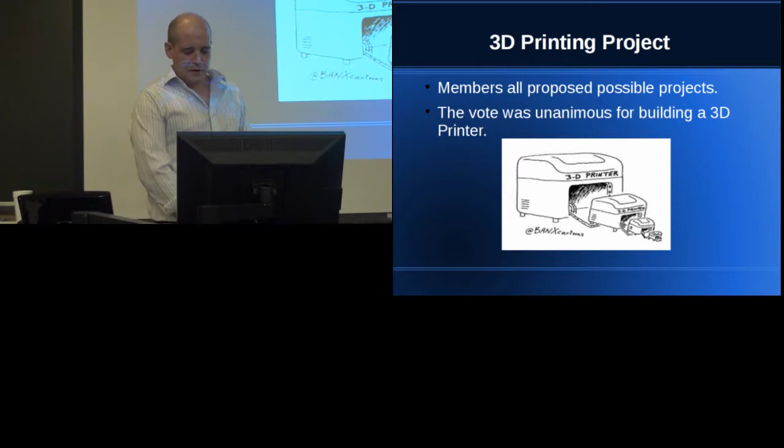So at our next meeting, we had a guest speaker, a member from the local Winston-Salem Fab Locker hackerspace. He brought in a RepRap printer to demo for the club, and everyone was really impressed with the performance and accuracy of the parts it was producing.

After more research on the RepRap forums and discussions with other people at the hackerspace who had made their own printers, I was drawn to the machine and decided to build a variation on the Mendel Max design, which is this one here.

After researching, I found out it was one of the more popular DIY choices in the 3D printing community for several reasons. It's got a pretty rigid A-frame construction.

It's also got space for a larger build area than the heat bed that I have here. I'm actually going to upgrade it to match about the size of this aluminum disc the heat plate's sitting on.

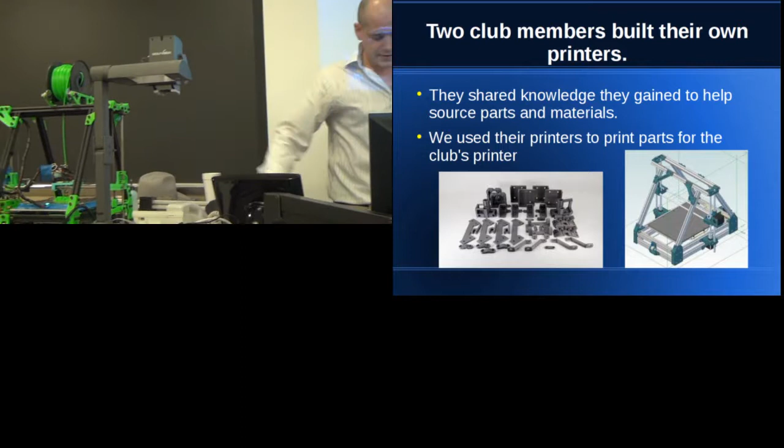There's also a lot of choices for components, as far as whether you want to use low-end drill rod for your linear motion components, or go with a higher-end rail and car system.

This is from a company called PBC Linear, and it's got nice smooth motion. It's coated with Frelon, a chemical-resistant Teflon-type material, and then a ceramic-coated rail, with very little play, hardly any play whatsoever.

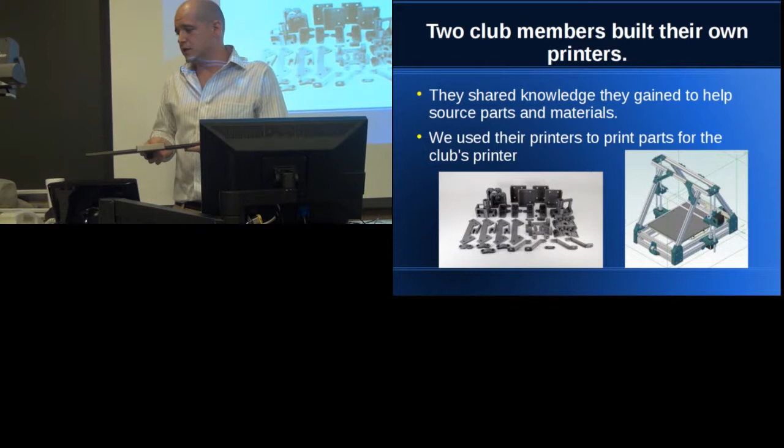So as soon as I get back home, I'm going to tear this down and rebuild it with some new parts.

Also, another member of our club, Edgar Salazar, came upon this new extruded aluminum profile designed specifically for linear motion components, known as MakerSlide. He used this to construct another open source design known as the OrdBot, which is also gaining popularity on RepRap and other places.

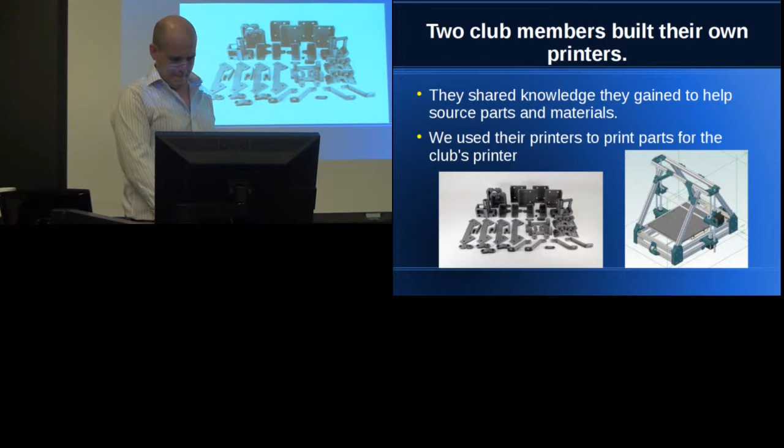So how I went about constructing this: first, I talked with Austin, who had demoed his Mendel Max at the club, about getting the parts that I needed, all the green parts here around the frame. I got the plastic ordered, then had him print up all the parts.

Then I went back to the RepRap forums, got the bill of materials, and started getting the extrusions, the drill rod for the linear motion components, Acme threads, stepper motors, electronics, and some more filament to print with.

Through the efforts of Edgar and myself building our own printers, it also helped provide the club with the benefits of knowing where to get parts at a good price and also at good quality.

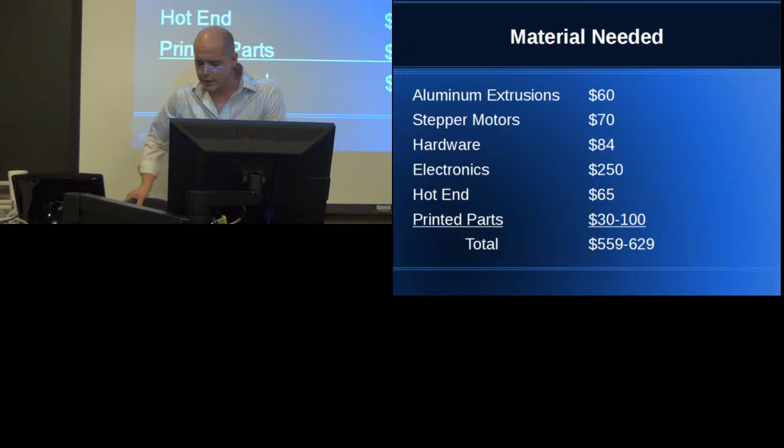So some of the materials needed, or pretty much all the materials needed here. The aluminum extrusions were acquired from a company called Misumi. They've got an outlet here in the United States, so you don't have to get it shipped from China, so you can get it pretty quick.

It's about $60 to $70 for the extrusions and the T-nut slots that you need, and depending on whether you want just plain aluminum or if you want to anodize it, I think it's about a $5 difference.

Then the stepper motors run about $15 a piece. You need 4 to 5 depending on what kind of extruder design you want to go with. Then you've got the hardware, the nuts, bolts, the drill rod for the linear motion on the X, Y, and Z, and the Acme threaded rods.

Then the electronics, this is using an Arduino RAMPS setup. It's got an Arduino 2560 with the RAMPS 1.4 shield on top, and that was obtained through reprapdiscount.com. It also came with the heated bed, all the end stops, and the display and encoder.

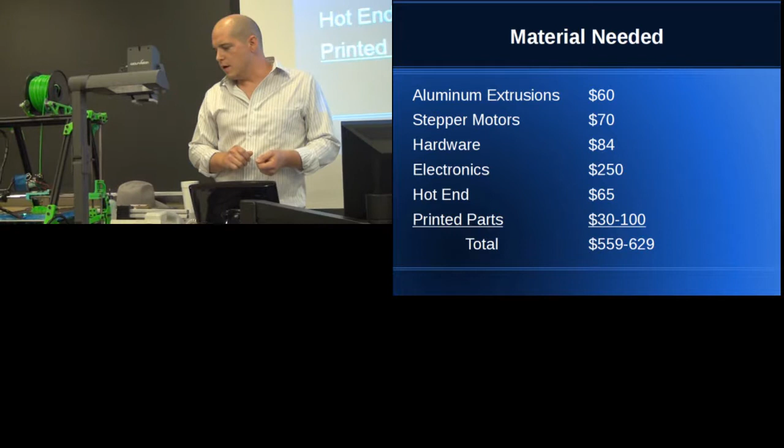Then there's the hot end, which is like a glorified hot glue gun tip. It's got a heater element at the end and a nozzle, printing at 0.4 millimeter currently. It's an all-metal nozzle. Some people like the J-head, which has Teflon going through the inside, but that wants to max out at like 240 centigrade. So if you try to print things other than ABS or PLA, you can have troubles with that breaking down and melting and falling apart.

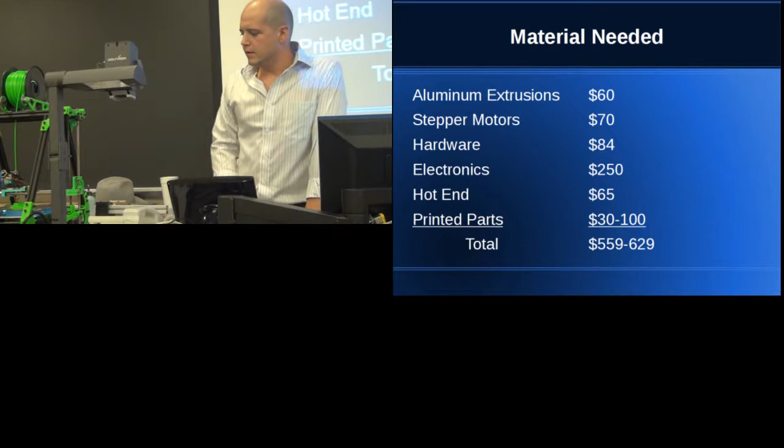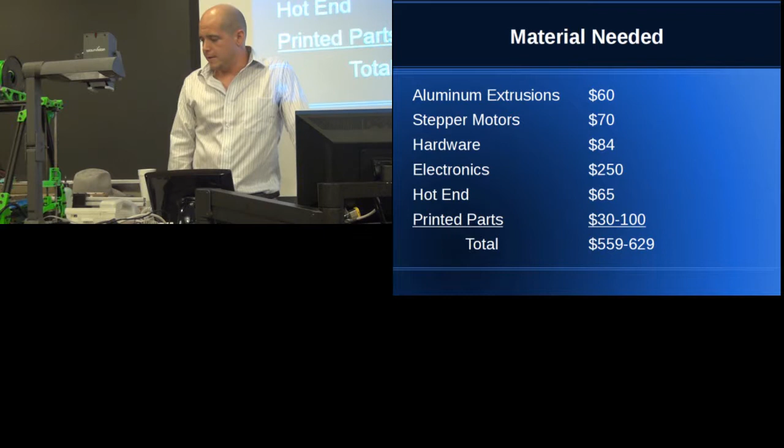Knowing that, I went with an all-metal design, the Trinity Labs Magma extruder, and that was about 60 bucks. For the printed parts that I had Austin make, I think it was like 25 for the filament, and he charged me like 35 to print it. So depending on who you know, printed parts can vary.

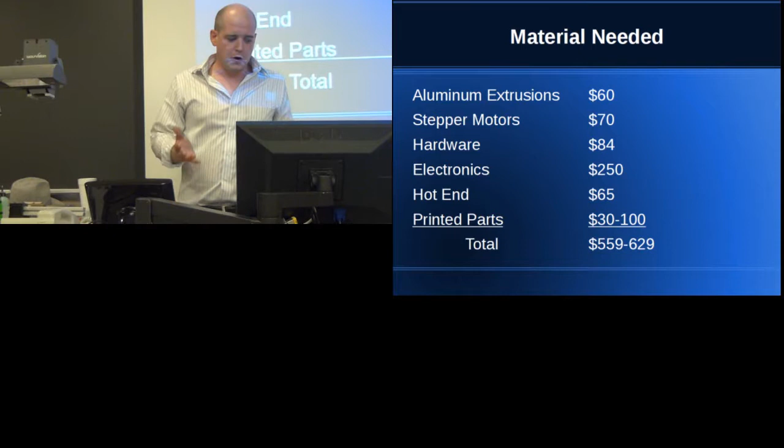People sell kits on eBay for about 100 to 120.

Filament - the two main types are ABS and PLA. ABS has a higher melting point, around 230 degrees centigrade. That's what's printing right now. It produces really strong parts and is really recommended for doing mechanical parts. This whole printer was made in ABS.

Then you have PLA. It has a much lower melting temp at 170 centigrade. It produces prints which are a little bit more brittle, not really recommended for the parts of a printer. They're also susceptible to heat and can warp easily. We had a friend that made a printer out of PLA and set it in his trunk on his way to give a demo, and when he got there, the whole thing had melted down into a blob. So he learned from his mistake.

Aside from ABS and PLA, we tried some other things. We have yet to try nylon, but there's a company, Taulman, that's making nylon in 2 different grades and in the 2 popular sizes of filament, 3mm and 1.75mm.

We've also experimented with weed eater line, and we've had pretty good results with this one particular brand. These orange pieces here were printed with the weed eater line. The only thing is we had to place it in a kiln and cure it at 300 degrees Fahrenheit for approximately 3 hours, which gets rid of any moisture that's been absorbed into the plastic. If you don't do that, when you go to print it, the plastic just comes out as a foamy mess. After it's been cured, we were able to run it through the printer and got some really good, strong parts, with some flexibility without wanting to tear apart on the Z-axis horizontal layers.

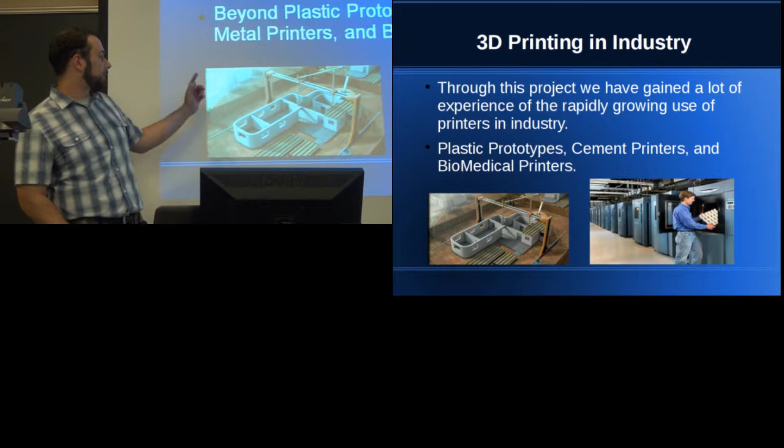You've got a picture here trying to build up a house, and those are a bunch of Stratasys printers all in a row. I'm not sure what they're producing, but they are.

So the company Stratasys, they're pretty much the biggest player right now. And they've been that way partly by acquiring a few of the second biggest players and whatnot. One of their first was Objet, based out of Israel. Objet was one of the first to do a multi-material printer, so they got snapped up real fast. Aside from different colors all in one print, you'd also get softer rubber-type compounds. They do transparent and opaque compounds, and they would also do support materials that could just be washed away with water and such. So that was a big one.

They snapped that up, and most recently they picked up MakerBot and Thingiverse.com. MakerBot had previously been doing, and still are, the tabletop home hobbyist type printers. But Thingiverse.com is a giant repository of tons and tons of STL files - lots of people making something they want to build, and they post it up there for other people. You'll see a bunch of files that are slight differentiations of it that fit somebody else's design better. So they ended up with a lot of publicity and effectively a free R&D department too, so that's pretty neat.

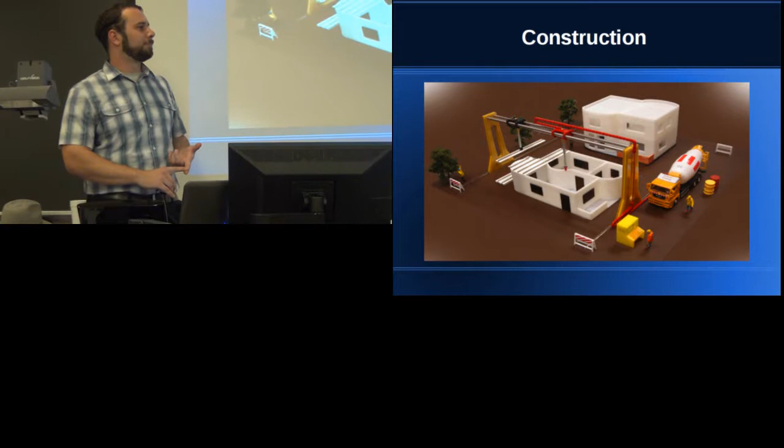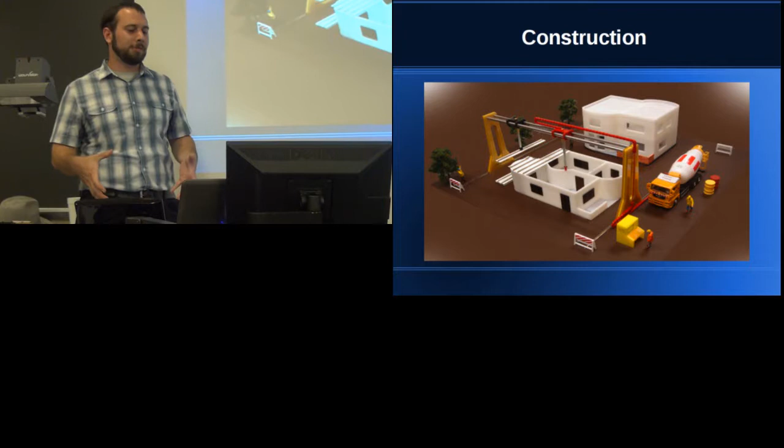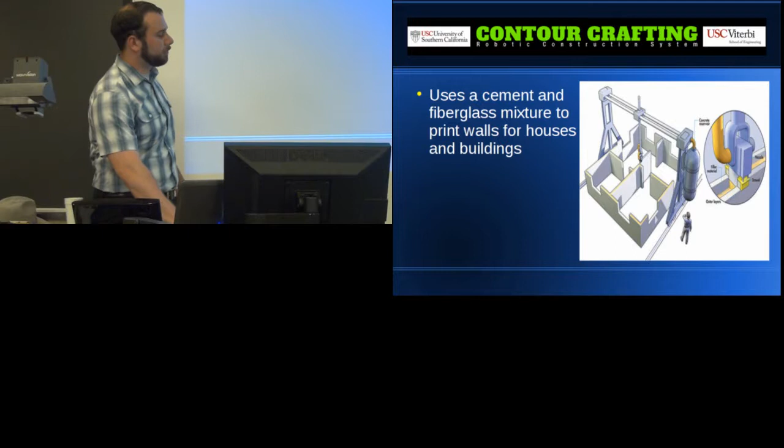And they're working to get 3D printers going on actual construction now. There's been one guy in, I guess it's Holland or Belgium - they're right next to each other, or the same thing. Guys out there have been working to design modular sections for a house that could be 3D printed with concrete. The one going on in the US is Contour Crafting, which is the name of their company, but it's also the name they've given to their system where they just build walls and don't have to deal with any horizontal planes or support. They're trying to make buildings through this, so they've gotten as far as a smaller model, but things are working. They just need to put it on a giant scaffold and do more than just a vase or walls.

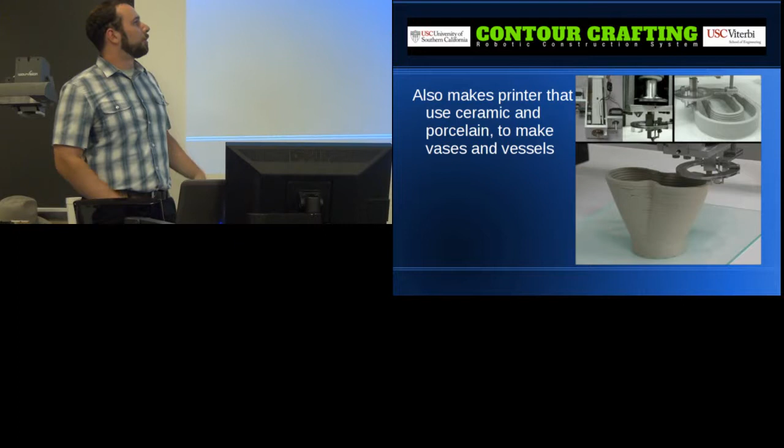We've also got 3D printed metal, and this is one thing that intrigued me a lot. You can do either metal sintering, which is a process where you've got metal either just as a powder or in a medium that'll hold it together. It gets fused but not fully melted together to full strength. So it's a process where once you have your part, you'll need to do a further heat treat or something to get it up to full strength and a solid consistency. Some of the methods for that still have problems with developing voids in the print because the metal isn't evenly distributed through the medium.

So the really neat one is selective laser or electron beam melting - they're the two varieties. They both go on in a near complete vacuum, and they melt the metal to the point where it's full hardness, basically a solid chunk of metal. You're done, and it's already been heat treated, stress relieved, all that fun stuff, and it's just a finished part.

There are also going to be some interesting things going on with 3D printing for extraterrestrial exploration, because it's hard enough to build things in space. Before we even get to making buildings, astronauts will need tools and production facilities, and you don't want to go hauling a whole factory into space. So 3D printers will work great for tooling to begin with, and once we've got it to the point where you can just put one up and start setting a building up, that'll run much better.

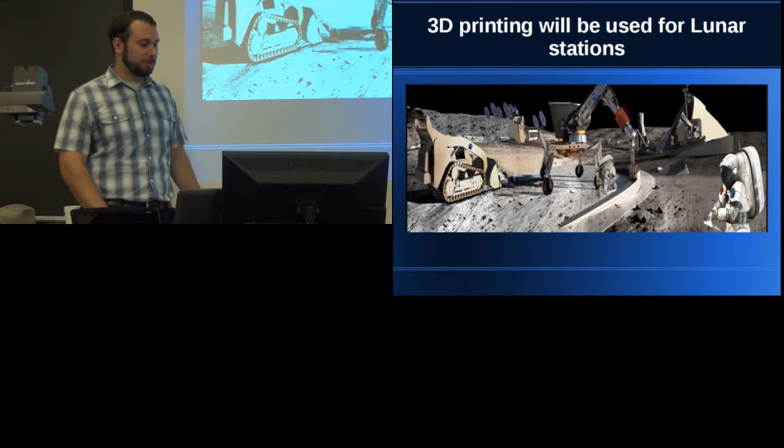Hey, how you guys doing? Might be a little nervous. Public speaking isn't really my forte. I'm much more comfortable with a soldering iron in my hand.

3D printing is changing the medical industry. There's a lot of things we thought were impossible that are becoming a reality with 3D printing technology, such as 3D printed organs. We believe that 3D printing could be a more practical and cost-effective alternative to transplants and cloning.

In fact, right here in North Carolina, Dr. Anthony Atala, the director of North Carolina's Wake Forest Institute of Regenerative Medicine, is making this happen. At a recent TED Talk, he printed a prototype human kidney live on stage using living cells. Although a fully functioning kidney for transplant is many years away, Atala's primitive organs were able to produce a urine-like substance. This is an amazing breakthrough that we feel could potentially save a lot of lives.

But the cool thing is the fundamentals of printing an organ really aren't that much different than the methods used for a desktop 3D printer. Like other forms of 3D printing, the living tissue is printed layer by layer. First, a layer of cells is laid down by the printer, followed by a hydrogel that operates as a scaffolding material, which isn't much different than the support material needed to support contours and curves with ABS plastic so the parts don't collapse. This process repeats with the living cells, and then the cells fuse and the hydrogel is removed to create a piece of material made entirely of human cells.

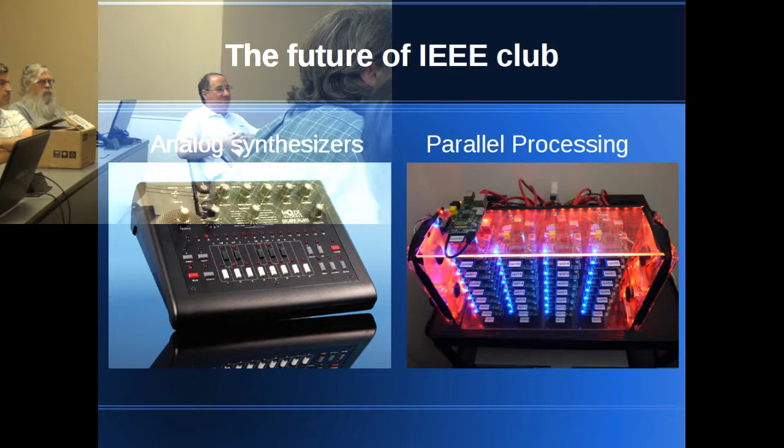That's a good question. Money, raising the money. 'Cause it's a student club and we're all raising the money ourselves. As much time and fiddling and thinking as it takes, I don't know what the cost of that is. Time as well too, because a lot of us are continuing education adult students. I'm 35 and was working full time while taking 17 credit hours and participating in IEEE Club. So time and money were pretty much our biggest hurdles.

From the time that you had built it, you had the frame, you put it on, you turn it on and it moves and stuff comes out, oozy out.

There was a time where you could reliably print a part that looked like the drawing you started from, which is a whole other level of success. Right? Lots of calibration. How much time do you think you guys put in to make that transition from it oozes out, oh look it moves, yay, to look I have parts?

We cheated. 2 days. Not even 2 solid days. We had a lot of help from Fab Locker, guys at Hackerspace there in Winston. Several of the guys there had a Mendel Max style printer, and a lot of the settings, all the steps per unit were pretty close.

There's also a RepRap calculator that was set up by Josef Prusa, and you can go in and put in what steppers you're using as far as the degrees per step, if you're going to be micro stepping, at what fraction, and then the number of teeth and pitch of the timing belt that you're using. Plug all that in and it spits out what your steps per unit should be. I tested those against what the Hackerspace configuration files had, and surprisingly it was a little bit more accurate using that calculator.

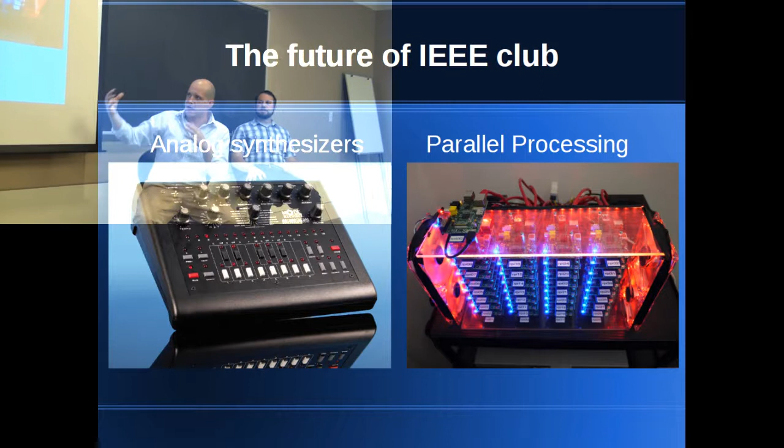Yeah, I found that too. I set up the Kinect on a tripod at an angle and have the person go around in 360 degrees. Then I take the tripod and tilt it to capture the top of their head. The software shows where the Kinect is relative to the object you're scanning, and when you do that last part it shows a trail of where it went around the person, then a dip to capture the top, gathering all that data and processing it into a point cloud mesh topology.

Is that right? Yeah. So you're saying he did it to me on purpose — he put that hollow space in my head?

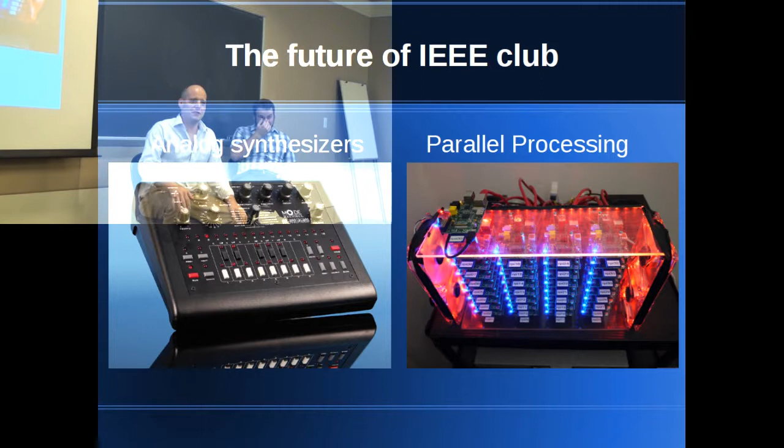After you do the scan, if you tilt it up and hit the top of the head, it fills in those voids. Then when you render the image or work on the model, running the watertight feature goes through and fills any voids or holes, which would have given you a flat top.

So that's where your brains come from. You could do a vapor bath on it to make it nice and smooth, and tell everyone you intended it to be a shot glass. It's very scary to print — either you get it right or you've got an argument. Good luck.

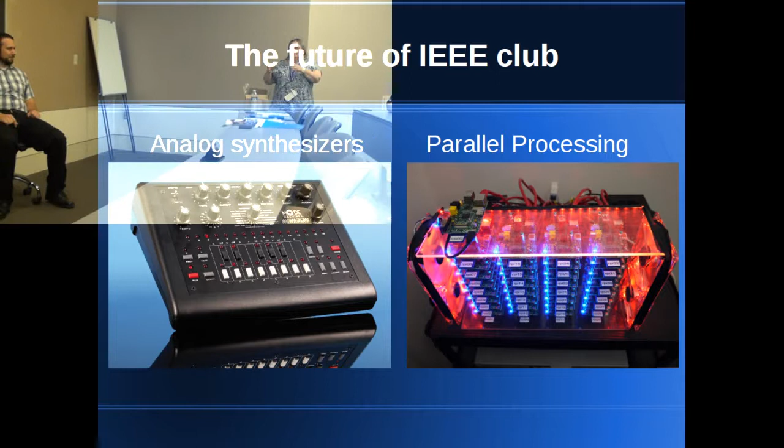I wanted to mention that a few years ago, IEEE, a huge organization, has an Educational Activities Board and a Women in Engineering Committee, which looks at what encourages women to go into engineering and what doesn't. Together they did research and found that women are less likely to go into engineering than into law or medicine, because they don't see the direct connection to how it helps society.

So I think your RoboHand example is spot on — it's going to pull a lot of people in. Once they learned this, they set up undergraduate coursework to show more examples of how engineers influence society, and found that it drew in more women, but also more men. So I commend you on coming up with something like that.

That's such a good, accessible way to make it understandable to everybody how important this is. We'd like to see the engineering field become a little more balanced that way, and we think it's pretty cool that our one female member of our local IEEE club was actually the one who suggested the RepRap printer initially.

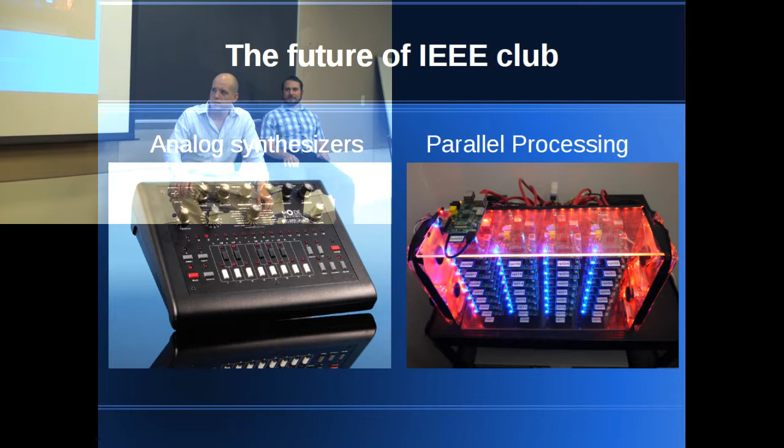Yeah, we just dive on in. Get together, brainstorm, decide which idea sounds cool, and go do the research, get the stuff, and have at it. That's pretty much our whole goal with the IEEE Club—we want to get people excited about engineering, get students excited about engineering. So we feel the best way to do it is sit down, vote on a project that everybody's excited about. We had a whole dry erase board full of ideas before we finally settled on the 3D printing.

Yeah, I wasn't there for that. They had to decide on a 3D printer before I would join. Yeah, the 3D printer did draw a lot of people. After we had the 3D printing idea, it was only a few more club meetings and we had people starting to show up from the Mechanical Engineering Technologies program. We had a couple of nanotech students show up and get really interested, and machining students. The experience builds everybody's resume, right?

Everybody who's involved now has a much stronger resume as well. It's funny too, we're working on a Puppy Linux build for 3D printing, where we're trying to get all the software you need into a Puppy Linux build. We both have degrees in computer engineering technology, but ironically it's our machinist who is our Linux expert.

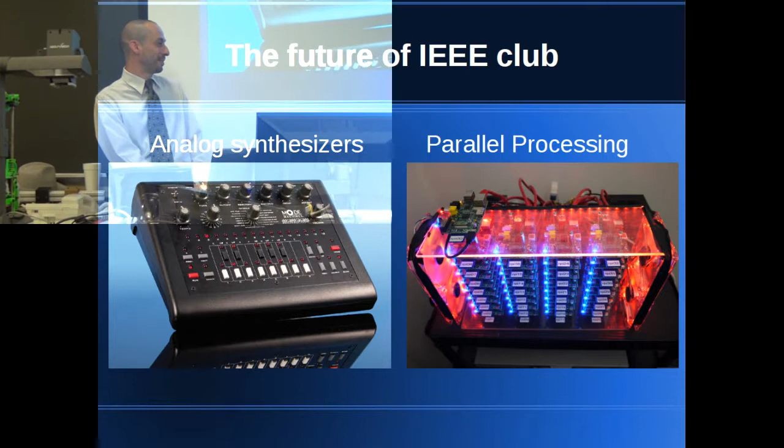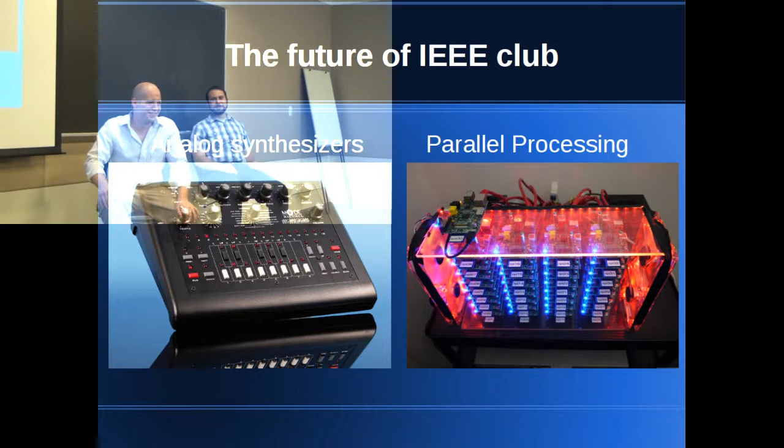I'm not an expert, I'm just better than these guys. You know what an expert is, right? An X in algebra is an unknown. A spurt in hydraulic physics is a drip under pressure. So an expert's an unknown drip under pressure. All right, we don't have enough pressure for that one yet. We'll see.

Are there any more questions?

One more? Yeah, I just wanted to add, Dr. Atala, who you saw on the program there at Wake Forest—his first big famous project, he's a urologist and a urologic surgeon. He had a patient, a young boy, who was in a terrible accident and had completely torn his bladder, almost completely lost the bladder. He literally grew a new bladder using that kid's stem cells and then planted it into the child. One of his cell printers was configured by one of our IEEE members in the Winston-Salem section. He took an HP inkjet printer, which now prints out cells, so if he wants to print a nose or an ear or whatever, he can use that printer.